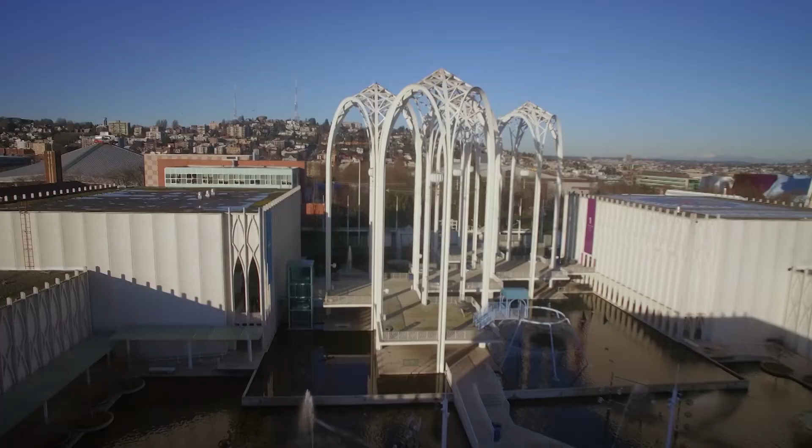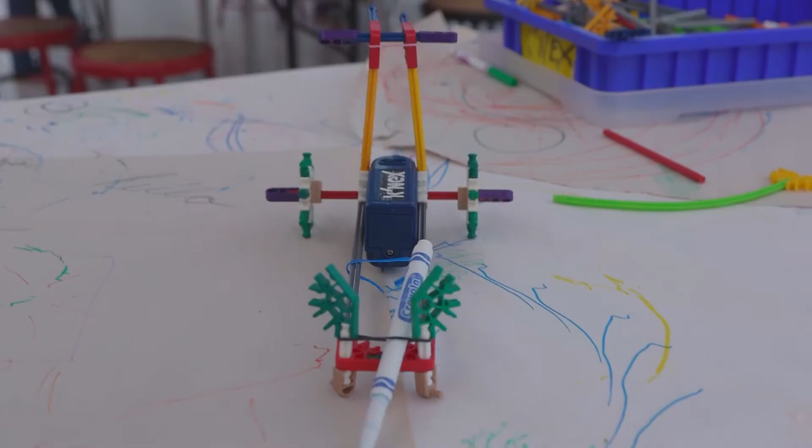For nearly 6 decades, Pacific Science Center has been the place to ignite your curiosity and to experience discovery, experimentation, and critical thinking. My favorite things are going to see the bugs and the butterflies. I love the laser light show. 3, 2, 1! For years, Pacific Science Center has been a partner with the school systems around the state to bring science into the schools in a way that enlightens science education. We serve over 1 million people every year, several hundred thousand out in the community through our outreach programs, most notably Science on Wheels. Look to your left, look to your right.

More than 85,000 of those students this year will be part of low-income families.

Yes, if we squeeze it.

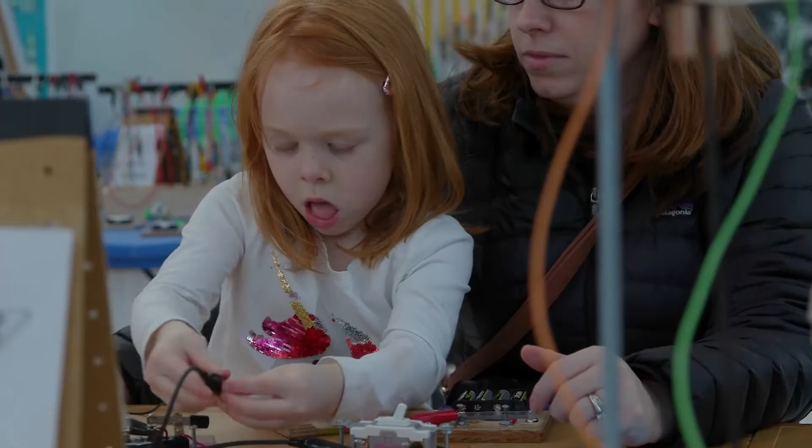We want to be a laboratory, a living room where conversations about science take place. We have undertaken a comprehensive program that includes deeply discounted memberships for anyone on public assistance, that provides free memberships to any child up to age 21 in the foster care system or experiencing homelessness.

Accessibility is really important for us here at the Science Center. When you work at a place where you see so many excited people and so many inspired people running around, we just want to make sure that people all over the state, from whatever backgrounds they come from, are able to enjoy that with equal access.

One of the big changes that I see in Pacific Science Center is its effort to be increasingly relevant to our innovation economy in this area. We have startups now that bring what is reality to life for people who have no idea about where all this future technology is coming from and what it's enabling.

We're just thrilled to be collaborating with NHL Seattle. It's consistent with our goal to be a platform for innovators. And what we're hoping is that people will come here and see this preview center and be inspired, but they'll also be inspired by what's happening right next door on the other side of this wall at the Pacific Science Center.

We are really excited about our new evening series that will be showcasing the science and technology of sports and entertainment. You think about the game of hockey from a science standpoint. Physics play a big role in the game and geometry, and so the ability to explain our game and what we're doing through a partner who's in that business is really remarkable.

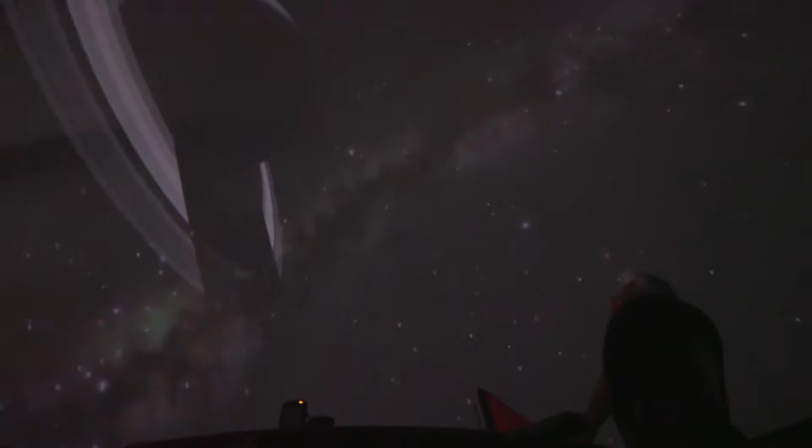We have a diverse set of exhibits and experiences. It includes some really world-class offers. We have the world's largest laser dome. We have the best IMAX experience in the Northwest. We have many rich offerings that appeal to people of all ages. We have a new effort, PacSci at Night. And now, with NHL Seattle here and this incredible world-class arena, we've got an opportunity to enrich experiences here in Seattle Center throughout the entire day and through the night.

The Science Center is a nonprofit. It really depends on its members and donors. For many years, I don't think philanthropy in Pacific Science Center was necessarily something that people thought about. But your dollars fuel our progress.

Just a little taster of what you can do and see and experience here at Pacific Science Center. I've been a member here for probably 3-4 years, and every time I come, I find something different. Very privileged to help make that film, and just the idea that there is so much here and so much more, including what we're about to hear this evening.

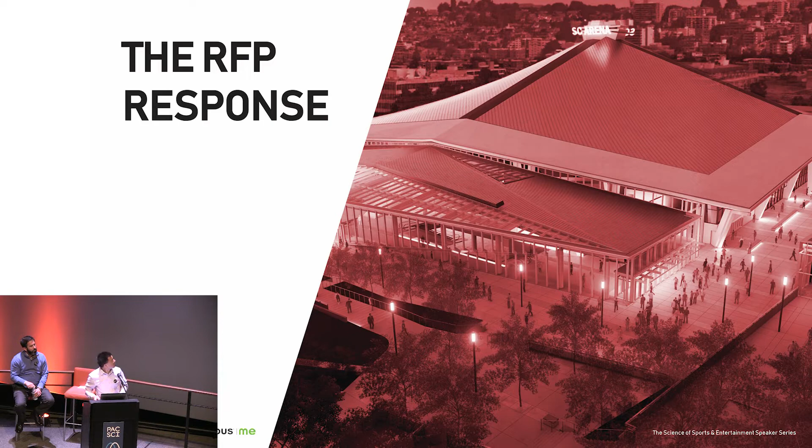Let me advance to the next slide. What I'm going to do to start is really just talk you through some of the evolution of the design process. Like Sean mentioned, this project has been in the works for a couple of years already, and it has flown by.

Right around the first of the year in 2017, the city of Seattle issued an RFP for the redevelopment of the arena. I'm not going to go into all the details of this RFP because it's quite extensive, but I'll highlight a couple of the primary goals you'll see on the screen as well: a world-class arena for music, entertainment, sports, the NHL, the NBA, and to design and operate the arena to really enhance the connection to the uptown neighborhood, integrate with the vibrancy of Seattle Center, and align with the Seattle Center master plans.

This building uniquely is part of a campus, and not a lot of the professional arenas that we do have that type of scenario. So it really does need to respond to both the urban context, the neighborhood context, and the campus that it lives on. That's been a really important part of our design.

So that's where our job began, and our first step was to essentially create a framework of design principles or design goals for the building, much like the goals set out in the RFP. We drew from several influences: our collective expertise on NHL and NBA arenas and sports facilities in general, and the historic arena itself, dating back to 1962. So here's what we came up with.

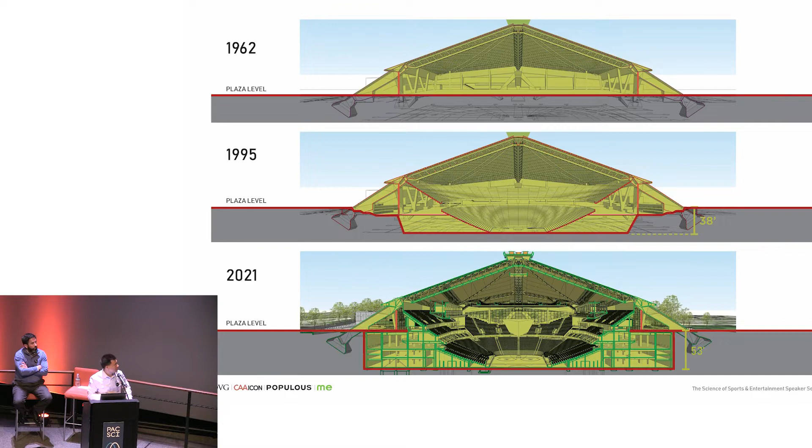And we chose to locate that on the south side of the arena. We've kind of rotated the plan on you, so north is to the left. But we chose to take advantage of that kind of newfound space that Sean also discussed. The current service end of the building, where the loading dock is and the marshalling area, and turning that into kind of a new front door. And I'll talk a little bit later about how we're able to do that from a service and a load-in, load-out standpoint. But we looked at adding the new entry atrium on the south.

And at the time, there was a parking program, an on-site parking program for approximately 850 cars that we were also looking to accommodate. So that was basically between the new atrium and Thomas Street. But what it did was it aimed to create a new gateway, really a new gateway and access point into Seattle Center along Thomas Street, extending from kind of the west edge of the center out to Uptown. And so those were kind of two of the primary moves in the RFP phase.

You'll notice, and I'll touch on this a little more later, but across the street, so this is the Bressi Garage where Pottery Northwest is currently.

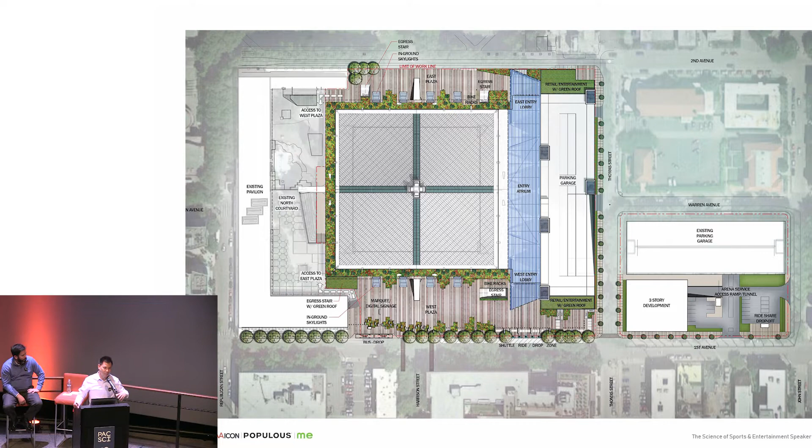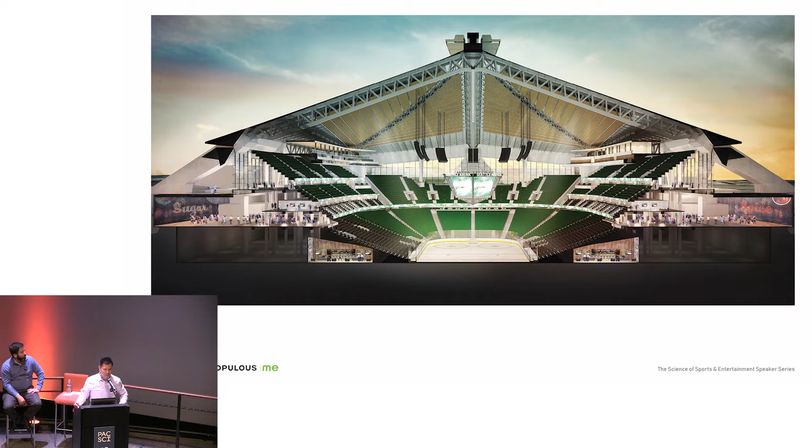So a couple other quick renderings showing the initial proposal. This was the atrium that we first came up with, almost 2 years ago. You can see kind of the remnants of the parking garage that existed then. And then a section cut through the new south atrium.

I think one of the principles at the time was to really celebrate this new internalized south foundation, or the south buttress as we call it, that is going to be the unique one out of the four because it will become internalized and celebrated within this new multi-story atrium. That held true through the design evolution to today. That south buttress is really going to be celebrated in the new entry hall, and I think it's going to be a magnificent feature.

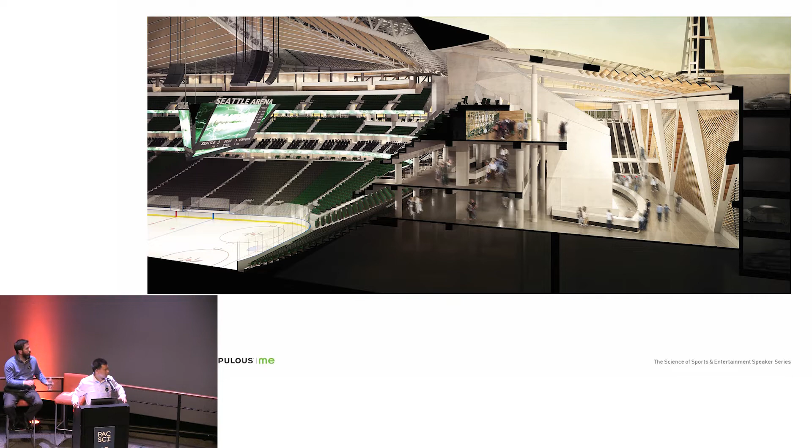And then again, about a no-compromise design. From day one, it was all about hosting world-class events, the variety of events that the city will want and love to see in this building. So we're always thinking and designing not just for a sport, not just a couple of sports, but the whole breadth of entertainment and sports that are out there in the industry.

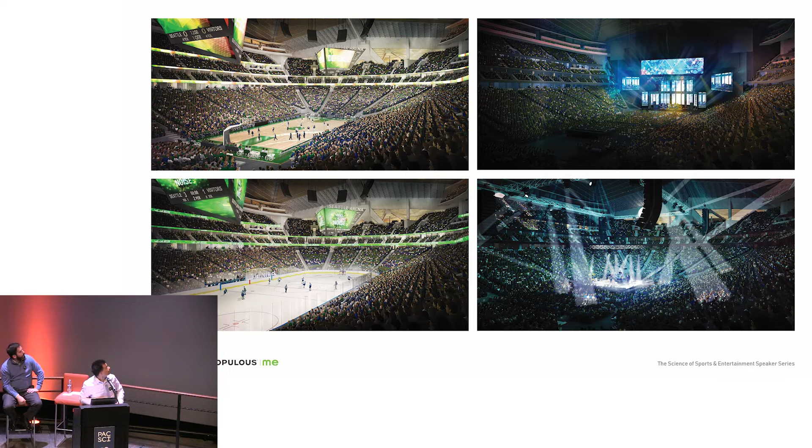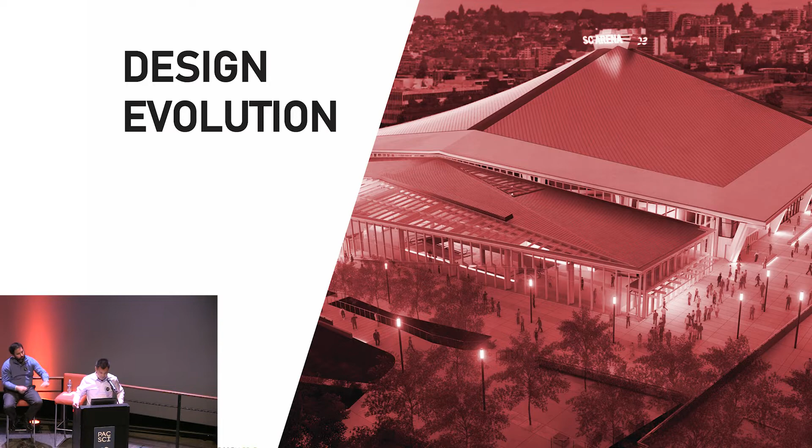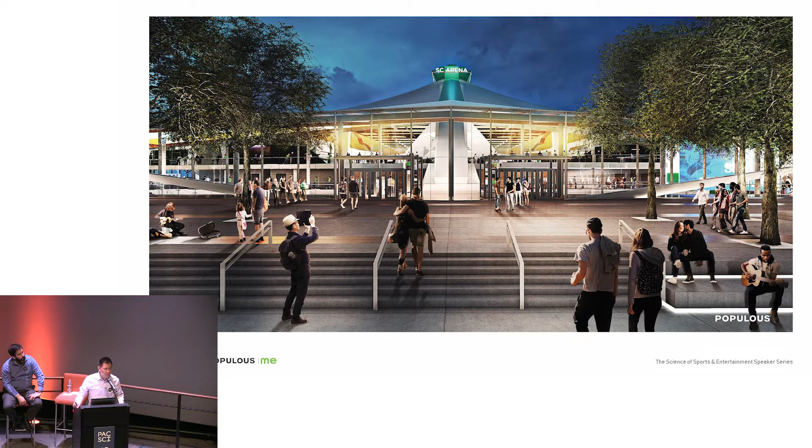So design evolution—fast forward a couple years, and it feels like my job is tough tonight because I have to cram 2 years of design evolution into about 15 or 20 minutes. But there were a couple significant events that occurred after the RFP phase that I think were ultimately what drove the design evolution, or most of the changes to the design.

First and foremost, the development team, Oak View Group, determined that the south side of the arena should be even more pedestrian focused. Initially we talked about it turning into a pedestrian and vehicle new gateway into Seattle Center. I think they made a commitment that it wanted to be all about pedestrians, just like the other plazas surrounding the building on the east, the west, and the north sides.

So that was one element. The second was that the arena received its official historic designation by both the local Seattle Landmarks Preservation Board, as well as the National Register of Historic Places, like Sean mentioned. So those two things became official after the initial proposal, and we continued through a rigorous process of review, evaluation, and approval by those landmarks entities, and they've really helped shape the design, and I think it's absolutely for the better.

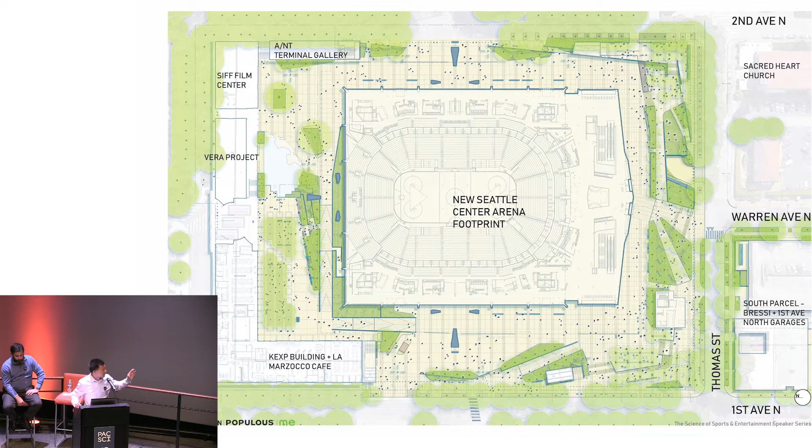So I'll flip to this next image. This is a rendering from the south side of the site. Essentially, if you're standing at Thomas and Warren looking north towards the arena, you'll remember there was previously an 850 car parking garage there. Well, again, the commitment by Oak View Group to make this a pedestrian-focused side of the building meant they found a solution to accommodate the parking inventory elsewhere, cutting the on-site parking inventory in half. What they were able to do is depress all of the parking below grade and make this a public open space instead of one focused on vehicles.

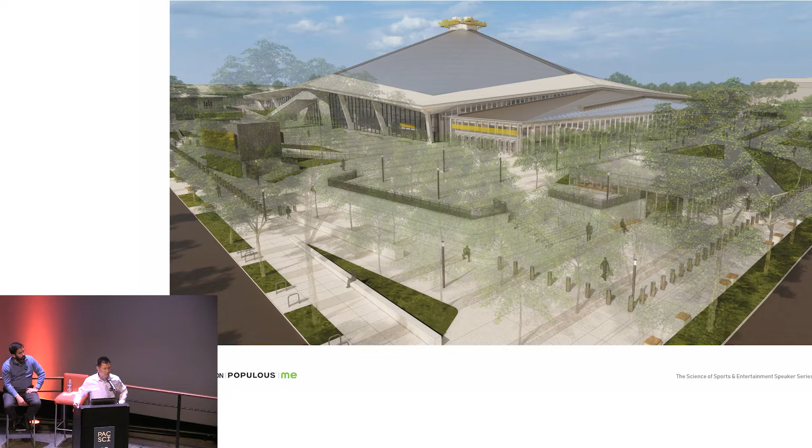So that gave us the opportunity to establish this transparent lens into the historic building that Sean mentioned. The design of the atrium, which we'll touch on more later, is really about maintaining views, sight lines, and celebrating that historic structure beyond it. It almost wants to disappear - it's a transparent lens, a transparent layer through which you can see that historic structure.

So this is the current site plan, and you'll notice a few changes compared to the one we showed previously. First off, the atrium - I'm not sure if you can tell, but it got substantially shorter in length. It was 440 feet long in our initial proposal, accommodating a lot of new lobby space, circulation, stairs, and escalators. It was kind of a circulation spine for the building because we're digging so deep down into the site that we need to move people efficiently with stairs, elevators, and escalators.

So it was 440 feet in length, and through our processes with the local landmarks board and the National Park Service as well, I think we all came to a consensus that the atrium structure and architecture really had to be secondary in every way to the historic roof. At 440 feet, it was extending beyond the length of the original building on the east and west sides - the dimension of the current arena from one side to the other is 360 feet. So we worked really hard to create a more efficient design, consolidate some things in the atrium space to reduce that overall length, and in the floor plan view you see here, make sure that atrium was no larger than the historic arena itself.

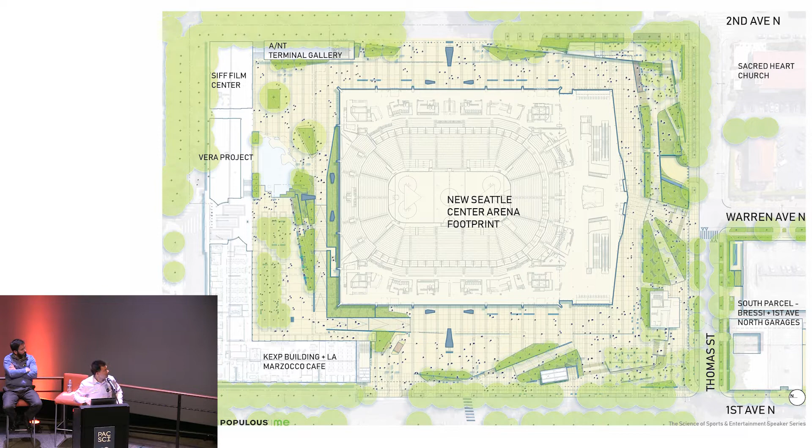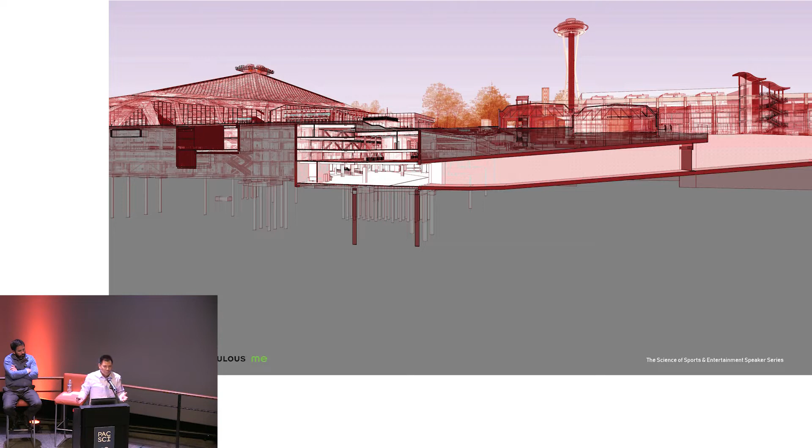I think, as Sean mentioned, this arena doesn't really have a back door like a lot of urban or civic arenas do, and this was our design solution to allow that to happen. Here's a quick image showing the current design and the design of the atrium.

You may notice a little design evolution from the initial proposal renderings. Again, that idea about always making the atrium secondary in its form, height, scale, and even materiality from the historic roof. You can see that the materiality is very distinct, so there's always that distinction between the two. That's critical in historic landmark design - any new addition wants to be visually distinct from the historic structure.

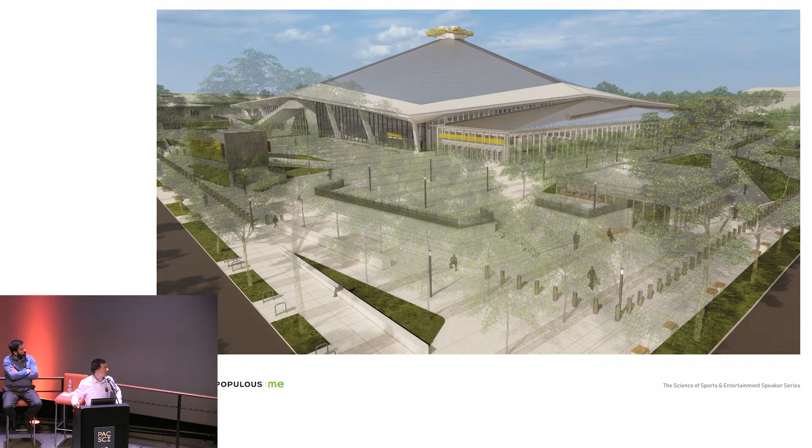We're doing that through materiality. You can see the scale and height are also secondary - it always maintains your view to that historic roof line that is so powerful, which will now be very visible from the southern portion of the site and beyond. The reduction in the overall length of the atrium allows the corners of the historic roof overhang to always extend out past the new atrium's east and west facades, so you're always going to read those prominent corners of the historic arena.

One thing I want to talk about - there are a few other pieces to the architecture that are very unique, again because of this subterranean nature of the building. Jeff will get into more detail on how these elements operate. But the new, visible architecture is really limited to the atrium - the other three sides of the building are essentially refurbishment of the historic facades.

We're not touching the roof. So where's the rest of the architecture? What's interesting is it has basically become 4 or 5 much smaller site buildings that serve very specific functions - I'll talk about those from an architectural standpoint. You can see them here - they're essentially pulled away from the building so they don't impact that historic look and feel, or those historic views to the facades. They're pulled out to the site perimeter or edges.

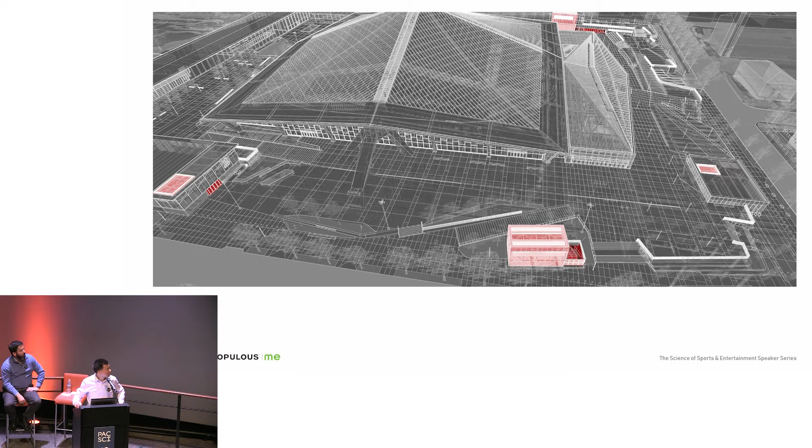If we do a cutaway section from the same vantage point, you'll see they're essentially a termination point for some underground tunnels, for lack of a better term. We've nicknamed these elements the snorkels. Jeff will tell you what the snorkels do, but I bet some of you have an idea based on that name. From a circulation standpoint, everyone's been in public assembly buildings, arenas, stadiums - exit stairwells, right?

Usually you're taking a stairwell down to some point and then exiting. In our case, you might take a stairwell up and then across horizontally through a tunnel and out to the side. It's been a really interesting part of the design challenge. If I trace a line around the seating bowl, that's kind of where the historic facade exists above - this shows the amount of expansion happening below grade. When we bring these stairwells up in the corners of the building, they're outside the original footprint, so our strategy was to push them even further into the site so they don't detract from the historic landmark.

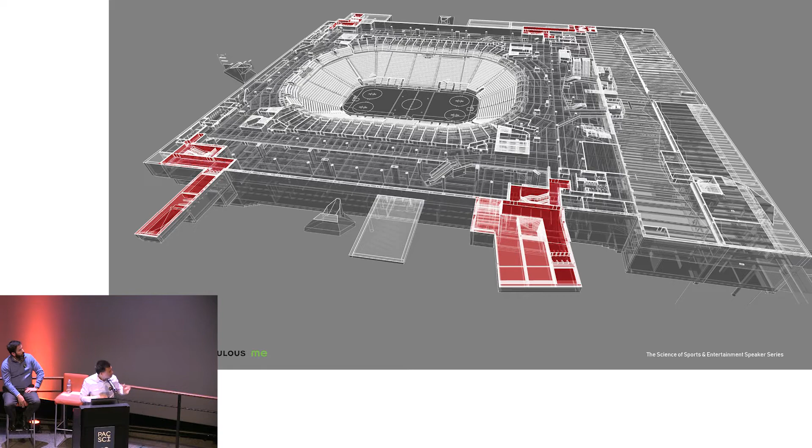These last few images will be another series of cutaway sections. This is an aerial view looking at the atrium, looking north, and again you'll see the scale and size of the atrium in relation to the historic roof - always secondary.

Maybe I'll ask the audience a question - there's a skylight right here. Anyone have an idea why it's shaped like that and positioned right there? Yeah, a lot of you got it right away - it is an absolutely amazing vista up to the Space Needle, one of Seattle's iconic landmarks. So from within the building and the new atrium, there's going to be a phenomenal connection to that local Seattle landmark through that skylight.

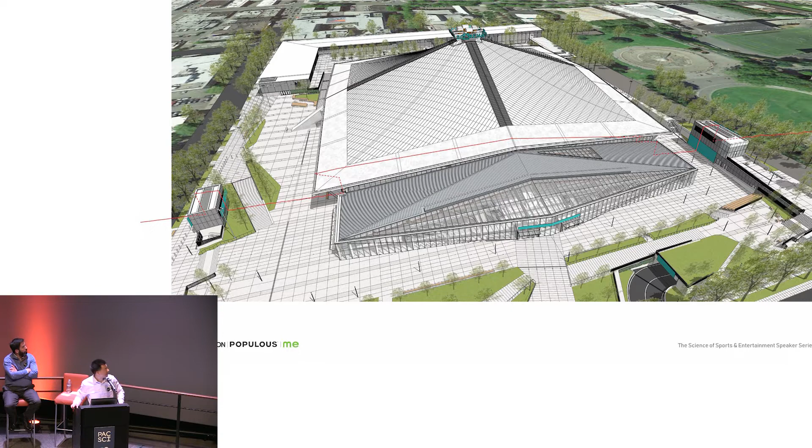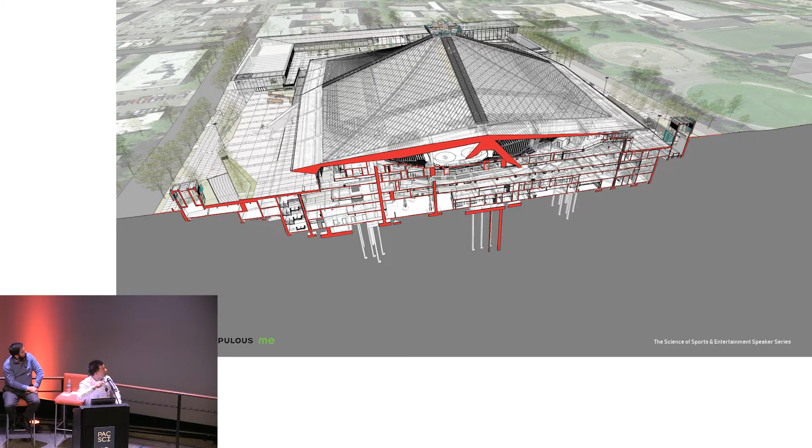Cutting away the section again shows the amount of design work and engineering going on below the surface - that iceberg concept Sean mentioned. I'll highlight a couple areas here - these are essentially the plazas. That's the East Plaza along 2nd Avenue, and here's the West Plaza along 1st Avenue. You'll notice the building extends clearly underneath them to these perimeter buildings I mentioned, which allow exit stairs and corridors to get up and out of the building. Jeff will tell you what else they do.

Here's another view, but really an amazing feat to dig down an additional 15 feet from where the event floor is today, expand that footprint on all 4 sides, hold that historic massive roof in place temporarily during construction while we're carving the earth out from underneath it. I think the thought of that, I can't wait to see it under construction, see photos of it. I may or may not stand down there while it's being held up above me, but it's going to be fascinating to see.

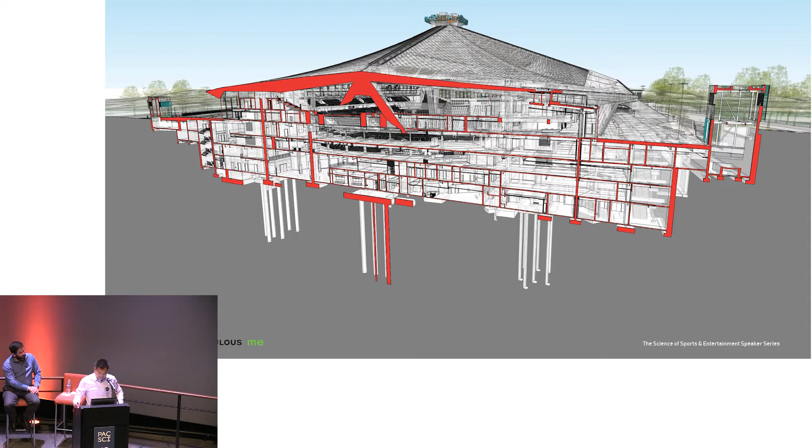This is another view showing a different angle of the atrium. One thing we thought was important in the design of the atrium was to have this more contemporary form to it. The historic building has that deep overhang created by the concrete edge beams held up by these Y columns, as we call them because of their form. That deep overhang creates a dark shadow line around the edges of the facility. The new atrium takes the opposite approach, so it has a very clean edge, very transparent. There's that distinction again, that contrast between the two elements we think is critical to the design.

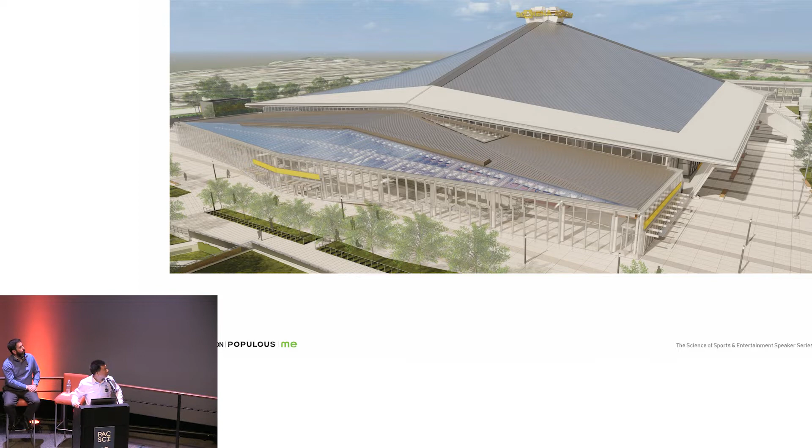Here's maybe a pedestrian level view of that new South Plaza. Think again about what is there today. There's a pathway that traverses the south side of the facility with a stairwell that takes you down and back up, east to west. Otherwise, it's a lot of the service area of the building, the loading dock, marshalling yard, et cetera. So talk about a major transformation, going from the service side of the building to a new front door. We think it's going to be magnificent. We're very excited about it.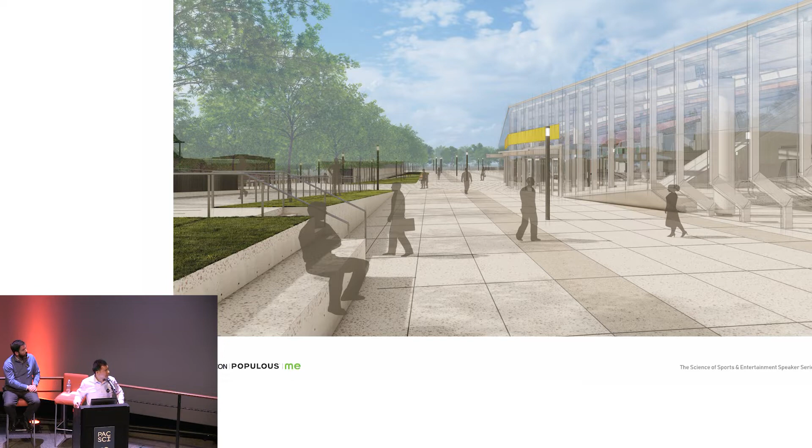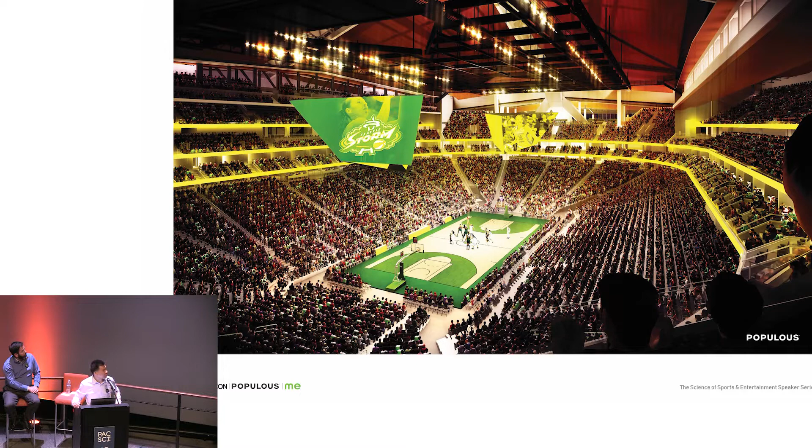We're not, unfortunately, going to get into too much detail on the interior or the seating bowl today. Maybe a topic for a future talk. But here are a couple of recent renderings that show the atmosphere and experience inside the new arena. This one's looking to the south towards the atrium. And then switching to hockey mode for all the hockey fans. I think I even saw a Vancouver Canucks jersey there. So, fellow Canuck. This is an image of a hockey setting looking to the north, with that amazing picture window view opening up towards the north courtyard, KEXP, and the resident organization spaces of Seattle Center.

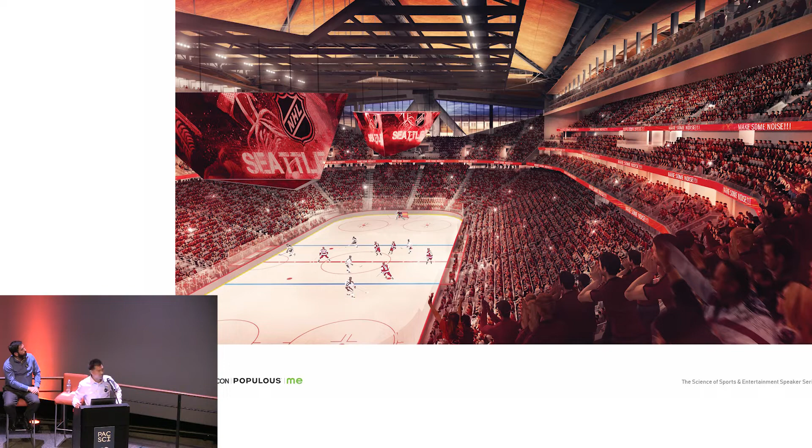So with that, Jeff, I'm going to pass the baton to you. Thank you.

I'm doing okay on time. As usual, in the design process, the architect gets all the face time, and the engineers bring up the rear, no problem. So for systems engineering, I was asked to come up with a couple topics to discuss. We do a lot of these arenas around the world, handling mechanical, electrical, plumbing, technology systems, telecommunications, security, those types of things. But there are dozens and dozens of engineering teams part of a project like this. Sean mentioned the crazy number of consultants on this team, and every one of them would deserve to be up here presenting their topics. So I'm extremely happy and honored to be invited. I'll apologize up front, I got some head cold on Monday and tried to sleep it off on the plane. My head blew up, I'm hearing this echo, it's very weird to be up here listening to this. So I'll do my best.

So inside of that, I'm going to talk a little bit about mechanical engineering. I'm showing a skeleton of what we call mechanical systems, which is how we move air and water around the building for comfort cooling. What you're seeing here is a skeleton of ductwork, or sheet metal systems. We do calculations and heat transfer calcs to try to predict how hot it's going to get in there when you go watch a hockey game, and it's our job to put equipment in place to cool the building down.

Some of the challenges we've come up with on this project, this is the most challenging one I've worked on. I did Phillips Arena back in the day for your Atlanta team, and it's interesting to see that not in the same light anymore, right? I also worked on Madison Square Garden, converting that with 600 events a year, staying live, trying to rebuild that for the Rangers team. This one is even more challenging for us, and the space is at a premium.

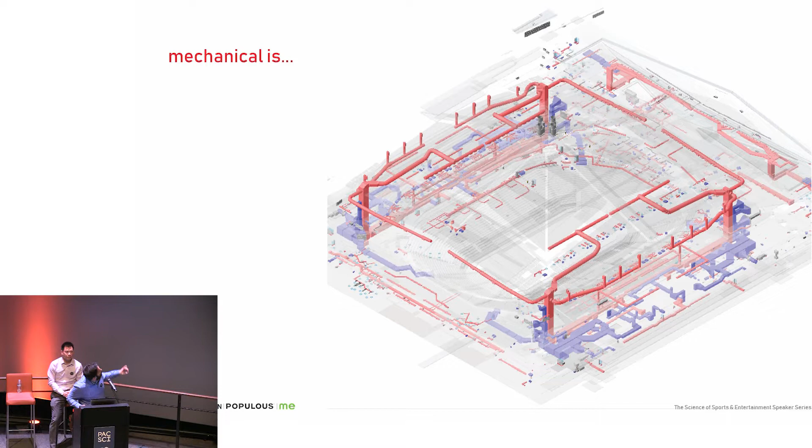Systems, cost, all that stuff comes into play. So the things I wanted to point out, I thought you might be most interested in: how do we take this building and deal with NHL compliance, which is a challenge in any building? How do we also handle concerts and other events, which are just as important for the function of this building? And what did we do? Then some common configurations of arenas that were extra challenging here. Sean alluded to some of it, but those are just some of the elements. I tried to prepare a compare and contrast type look.

That's an arena we're designing on Long Island right now for the Islanders. That's much different, just building on top of empty land. Looks a little bit less complicated, doesn't it? That team will tell you that's not true, though. I should be very careful.

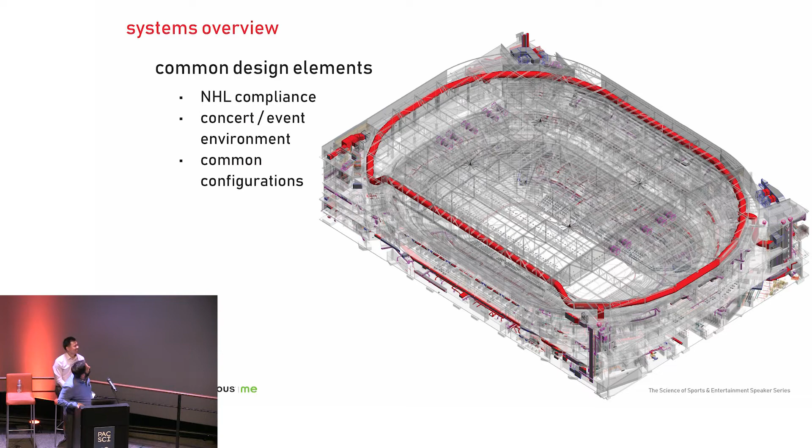So what is unique about NHL? Can I use this one? Okay, so...

NHL for dehumidification, I think this is probably pretty obvious. The arena has to have a dry, dehumidified environment. The NHL wants it cool and dry. You all live in, it's not a hot climate, and we talk about humidity, but you are a wet, damp climate, so we have to use the system to respond to that. When I mentioned that Belmont arena, much hotter, more humid climate, you might be surprised to hear that, but humidity is relative, and it gets so much hotter there and wet in the worst months of the year for the NHL, the Stanley Cup Finals, it's starting to get hot and humid. So we have to pay attention to that.

So what we did here, this equipment, I'm just highlighting some of the stuff we put in the arena, was very unique. It's the first time we've ever done this. We have 8 dehumidification units that do nothing but dry out the outside air. What's in there, we call it a desiccant wheel. Most things you buy nowadays, like shoes or food, come with a little packet of desiccant in there, and this is a commercial version of that. It's chemical. As the air moves through, it attracts moisture out of the air and dries that airstream out. Then the wheel rotates to the top, and we bring another airstream in and heat the heck out of it to dry that wheel out so it can rotate back down and redo its job.

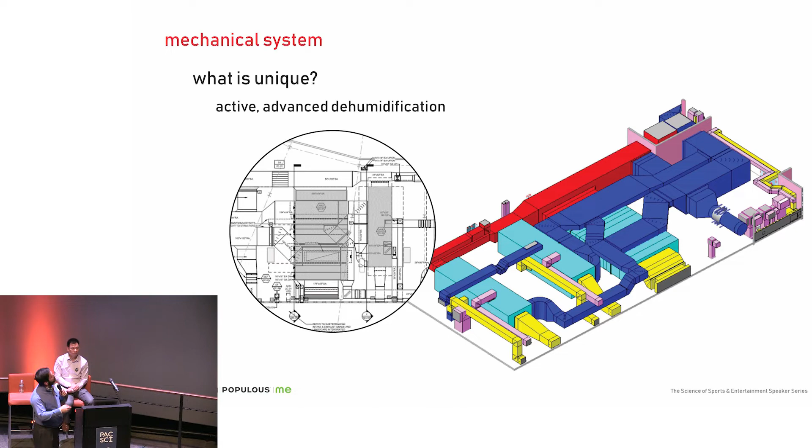Now we deal with concert environments. We've handled NHL conditions, so what are we going to do in a concert environment? Here we have acoustic issues, and we want to be able to move air through the bowl. Look at all the volume I have there, in Belmont. Most arenas, if you go around, not every arena, but most of them will have tucked up in the rafters big round sheet metal ductwork. And that's what that's doing.

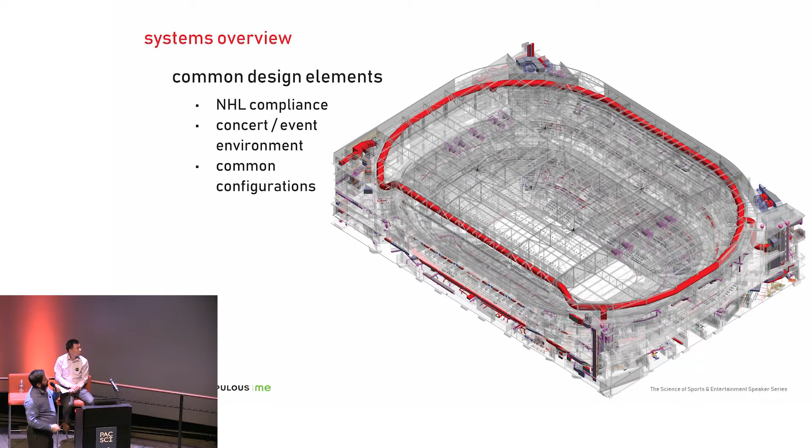Here, we didn't have that kind of space. Because of the iconic roof, we didn't have the volume we normally have. I'd say most arenas have their ductwork up here. So we came up with this strategy, but we split it. You walk in there now, and there's a lot of exposed sheet metal, and that all has to go for the new seating bowl. So we ended up with a split, and there's a riser back here that comes up, and we blow air across the top, and we blow air this way. Again, we were fighting space constraints, but we realized this gives us an unprecedented amount of flexibility for concert events.

What we always have a challenge with is pyrotechnics. People are moving smoke on the stage, and if we don't be careful how we're feeding the bowl, we can mess that up and blow that smoke around. We just need to be able to condition it at lower volumes and speeds so people aren't impacted acoustically during the concert.

So we can shut all these off individually at multiple locations around the venue. When there's a half house event, where you curtain off pieces of the seating bowl, we can actually shut that air off and function a lot better than we do at most arenas, honestly. It's going to be pretty special.

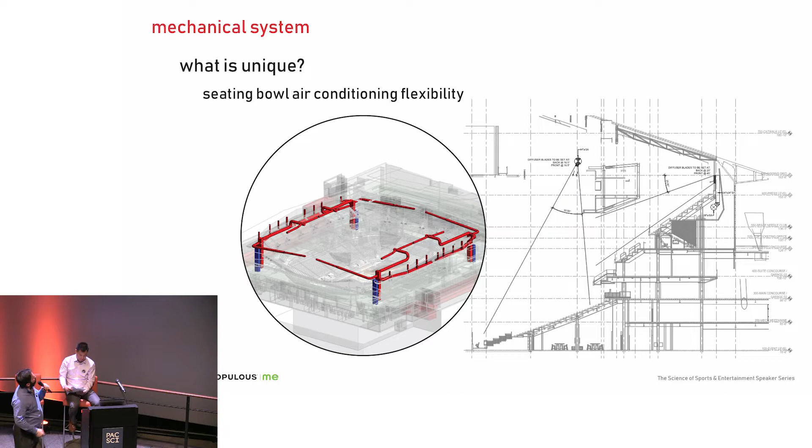This is a cutaway view of the same thing. So what you'll actually see in the bowl are these runouts.

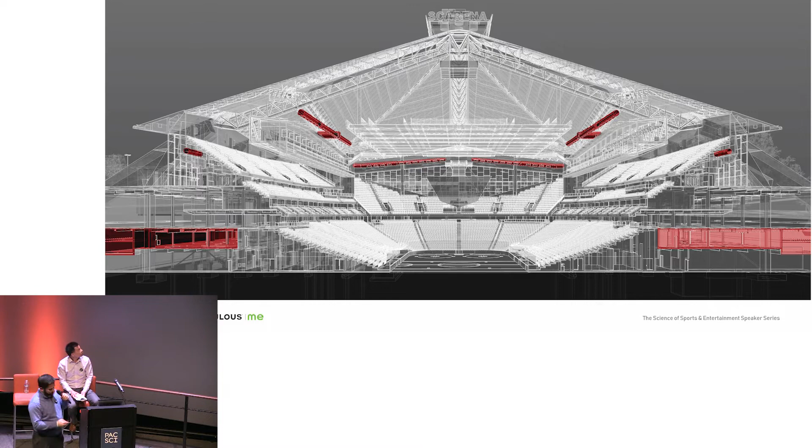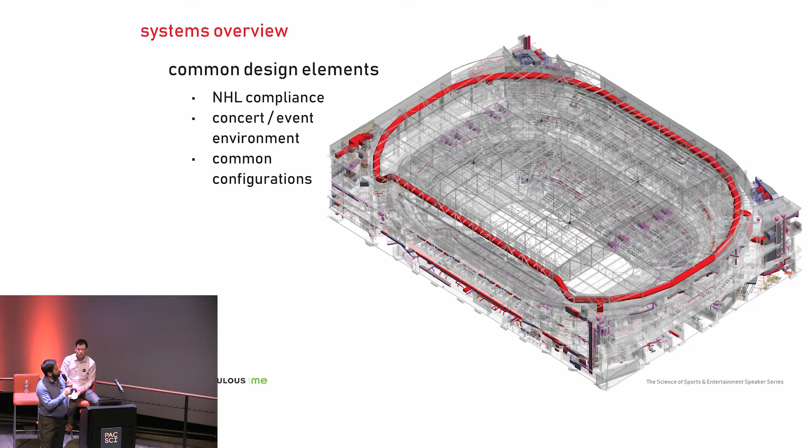Now probably the biggest complication we had was common configurations. How does the building get air in and out? How does the building breathe? That's one of our big issues. You're always bringing in fresh air for ventilation, for indoor air quality, for human comfort, and always taking the bad air out.

This is T-Mobile in Vegas, one we just worked on, that Jeff mentioned. Look at the roof of that thing, it's just full of equipment. This is trying to show you scale. If I was standing there, I'd be about this tall. That's a massive piece of equipment on the roof.

And that's what we typically do, or we're trying to find locations along the facade. This, I'm showing you a picture, same T-Mobile again. These are louvers, there's all kinds of louvers tucked under here that we're trying to hide, but we use the facade of the building all the time. We use the roof all the time.

Jeff just says, hey, solve this problem. Here's another example.

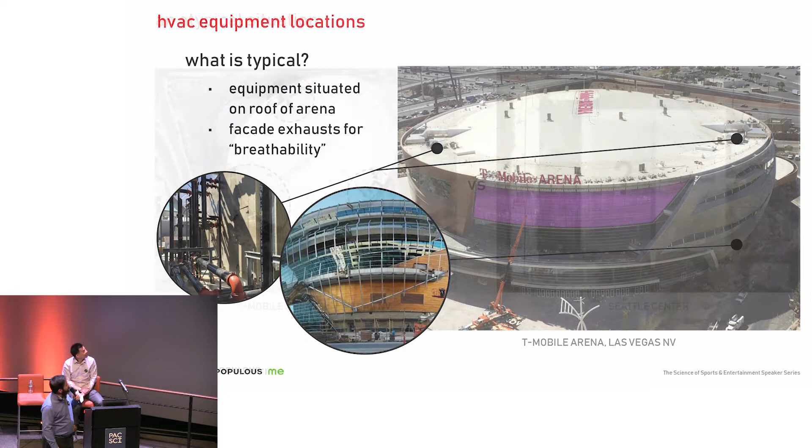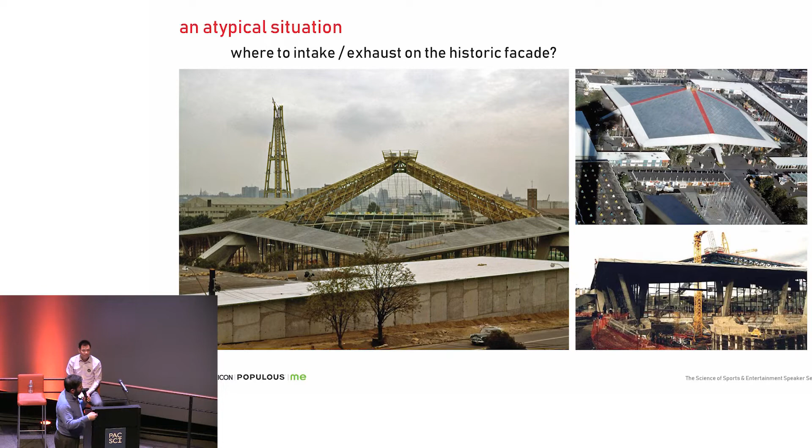So again, we threw this in here just to highlight, look at the scale too. When you walk up to this building, the roof is highly visible, so there's just nowhere to hide our equipment. And believe me, architects want to hide our equipment.

So we had some kickoff meetings, and I dug this out of our design file. This is really a result of one of the early meetings we had, where our concept became: how do we use this plaza? We have this extensive plaza, let's come up with a way to air it. We were thinking we'd integrate this with elements in the plaza, where you'd have a seating area with louvers underneath, and air would be moving in and out. A really creative way to integrate everything.

So you started to see us make notes about how we would do it. Maybe air's coming in here, air's going out there, and we'd find these integrated elements. But it was just too much, it got ridiculous. There was too much air coming in and out of the building. If you skateboarded here, we'd blow you over.

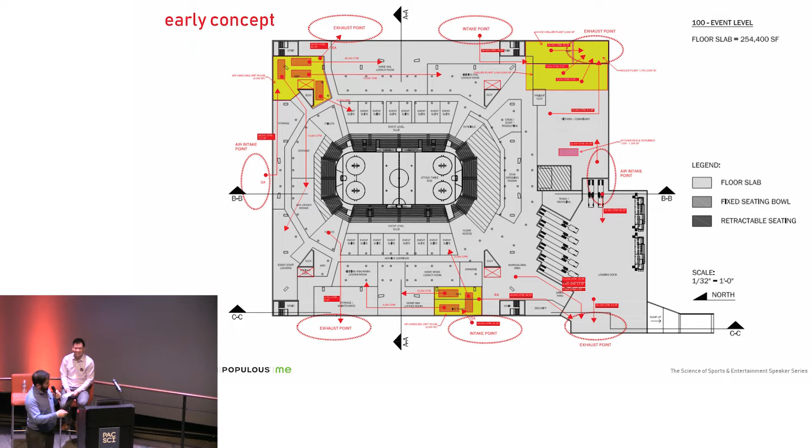So that's where we ended up with these snorkel systems. There's 5 shown here. One of them is actually primarily exhaust for the garage and stuff, but these elements actually became the targets for how we'd get air in and out of the building.

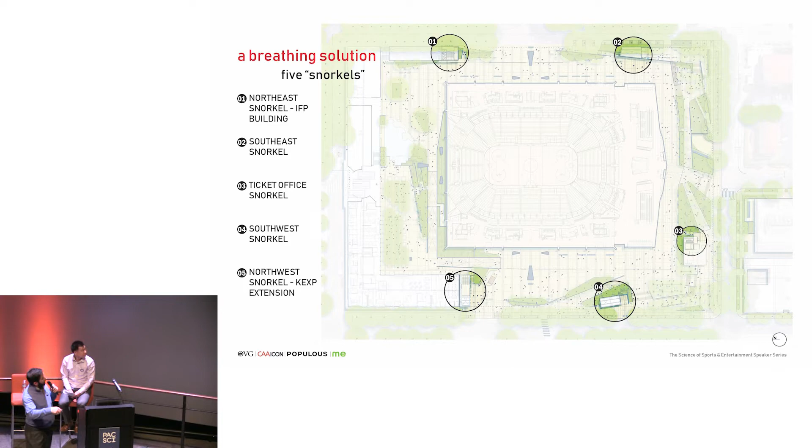And Jeff mentioned the stairwells. Well, we decided to follow them to the edge of the building, and we built these air tunnels. So air is doing the same thing the people are, to get in and out of the building.

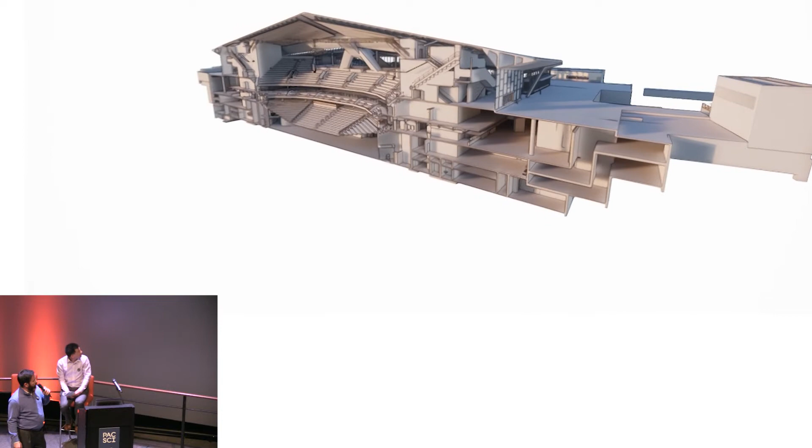And I actually showed this, can you run that? So this animation kind of gives you a sense of the scale, and then where they're integrated. We should slow that down.

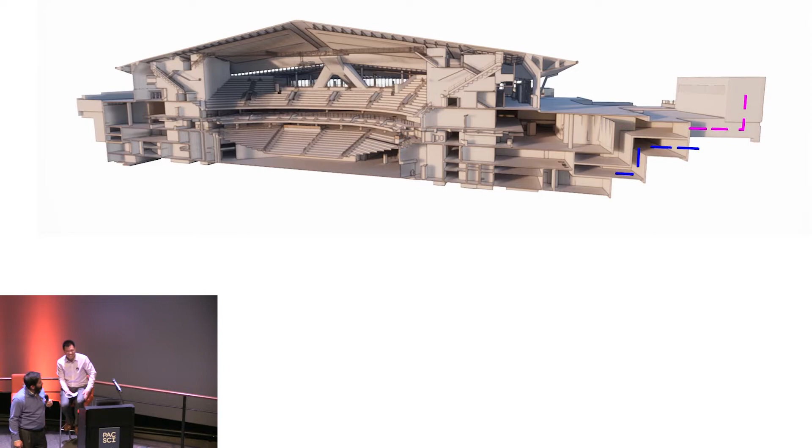So those elements that Jeff's talking about, hidden in there are our points of exit and entry for air from the building. It's kind of neat, it's the way the building's going to breathe. And we're able to do that without making big dramatic impacts on the existing facade. So it's a proud moment, although there were many sleepless nights on how to make this actually work. But look at the end result.

No one would think that this was... Jeff, would you talk about this? This isn't what you'd normally attribute. These perimeter buildings, these mechanical intake and exhaust and stairwell structures, really became part of the architectural design of the building. They're detached from the building, and they're integrated with other surrounding buildings. I see Tom nodding. Here is essentially an extension on the southern end of the KEXP space.

So it's fully integrated into that building, and it provides both a stair exit and the mechanical intake and exhaust that Jeff is referring to. But it takes on the architecture of that corner of the site.

I think what's really unique is this building really does have four sides. And even though the historic facades are identical, you'd argue symmetrical, the environment or plaza spaces they exist in are very unique on all four sides. The relationship of the West Plaza to First Avenue and the KEXP building, the North Courtyard space and that north facade — we're going to have a picture window between the arena seating bowl and that north courtyard space, very unique.

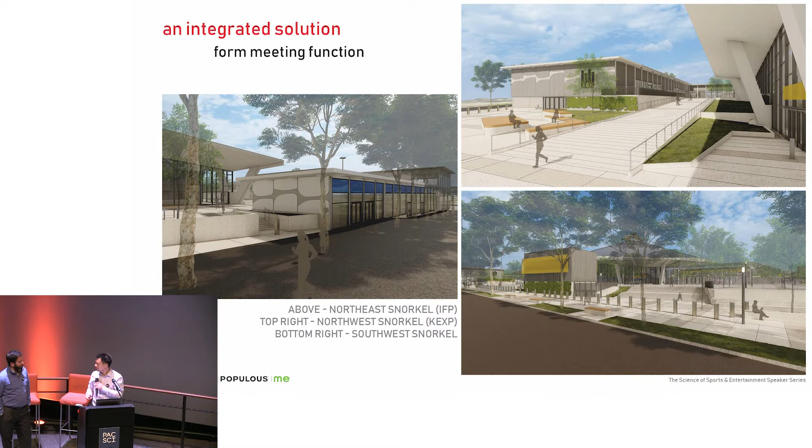I think the only other thing I wanted to say is, you know, we get a lot of credit for designing buildings like this, but man, it's pretty special to be involved with you guys — Tod and Tim — who have visions of building things like this, and Jeff and his boss Chris come up with these ideas, and we get to help make it work. That's what's neat about being an engineer, actually figuring out how to make these things work, because day one you're like, I don't know how we're going to do this.

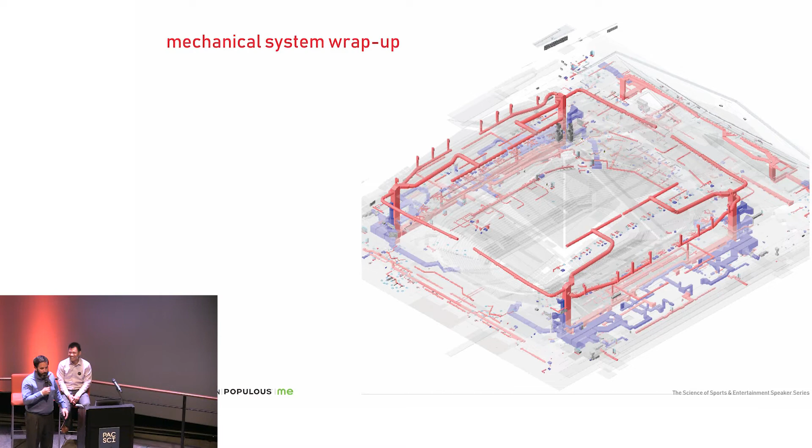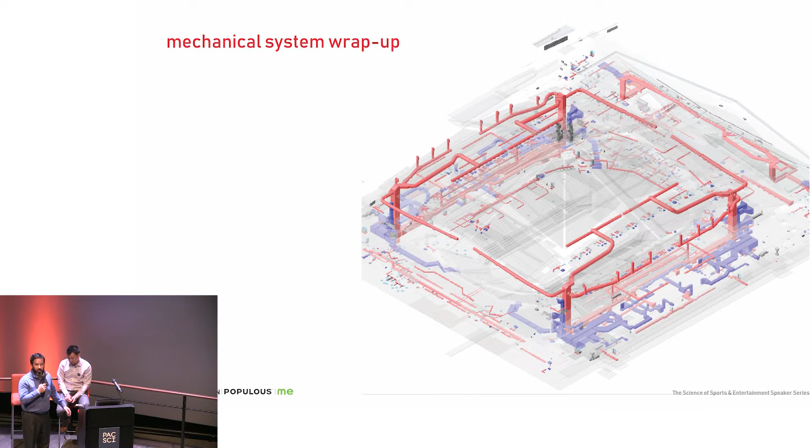Yeah, but now, you know what? The next step is going to be more difficult. I've got to build it. Our job is going to be to try to do what we can to keep the intents intact, and the contractors — it's an amazing community up here, I've met lots of people in the construction industry, and they're going to do a great job. But that's going to be very interesting for us to watch. Hopefully it works out perfect.

So thanks very much to Jeff and to Sean. I think the bottom line is they like a challenge, but it will be an absolutely fantastic arena when that puck drops in 2021. Well, we have a great chunk of time now for you to all ask questions.